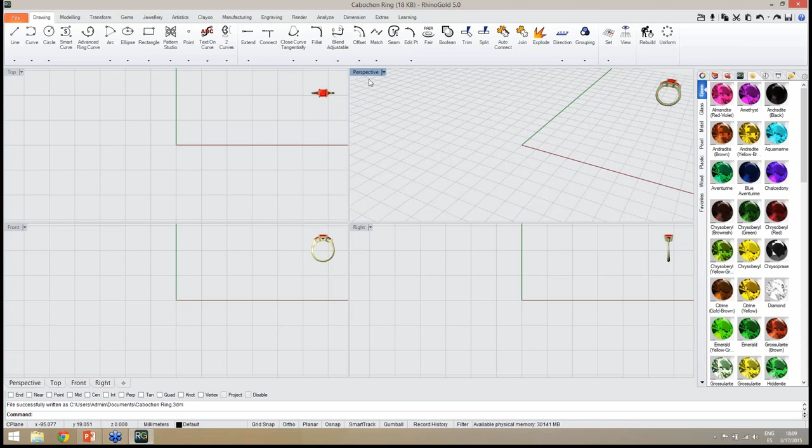Let's start with RhinoGold. Let me open the RhinoGold interface. So let's start making this cabochon ring. And as always, when we start creating a ring, and in this case with a central gem, the first steps I recommend are always the gem, the first gem, and the ring size. So let's create first our cabochon using the Cabochon Studio tool.

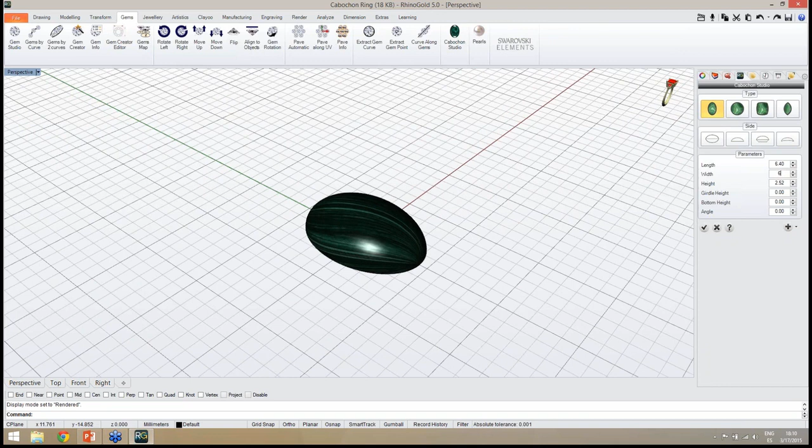As you can see, under the gems tab, we have all the parameters from the Cabochon Studio in this side panel. And now we just need to define the shape. In this case, I'm going to use oval shape, and of course the measures. So in this case, I'm going to use a cabochon with 6 millimeters and 4 millimeters, and then height with 2 millimeters.

Finally, as you can see, it's flat in the bottom. We have several types of cabochon cut. In this case, we are going to use this option, the side height. So this is the idea. First, we create the cabochon, and here we go. So now the idea is to define the ring size.

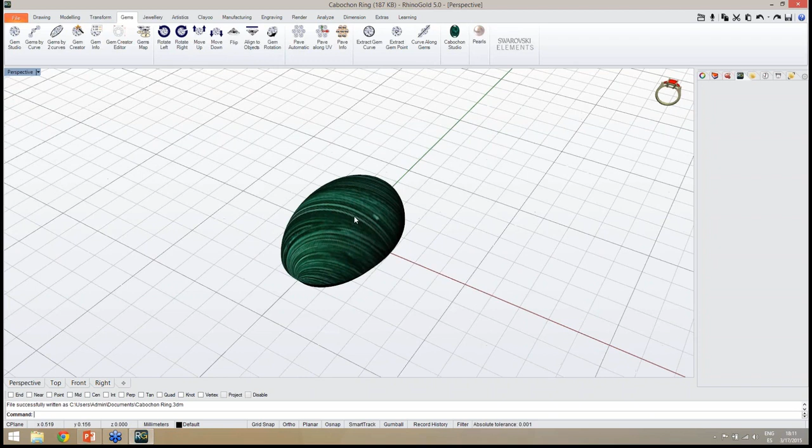Before defining the ring size, I'm going just to move on with the head studio, just to apply a head studio in this cabochon. So I'm going to use, under the jewelry tab, the head studio tool, as you can see. And now the first step is to choose the gem I'm going to use. So I select the gem where I want to apply this head studio, and now we have several parameters in order to define our head.

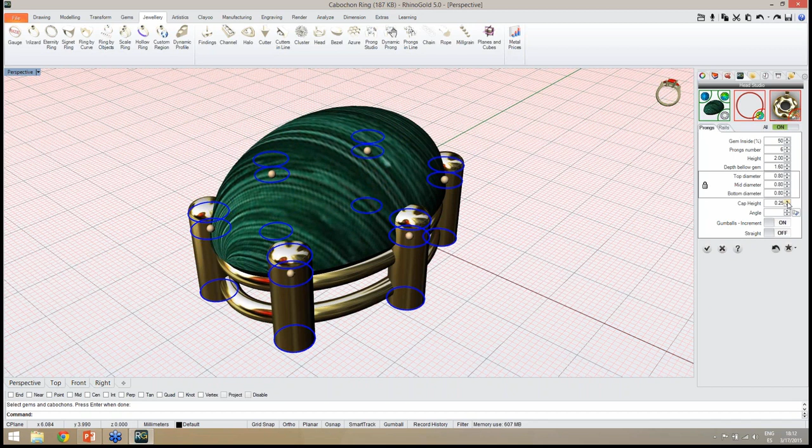So I'm going to start with the number of prongs. I'm going to use in this case 6 prongs. Then I'm going also to define the cap height, in this case 0.25, 0.3, I believe it's more than enough. And of course the percentage from the gem inside. In this case, let's try 25%. Looks good. As you can see, it's a little bit inside the gem.

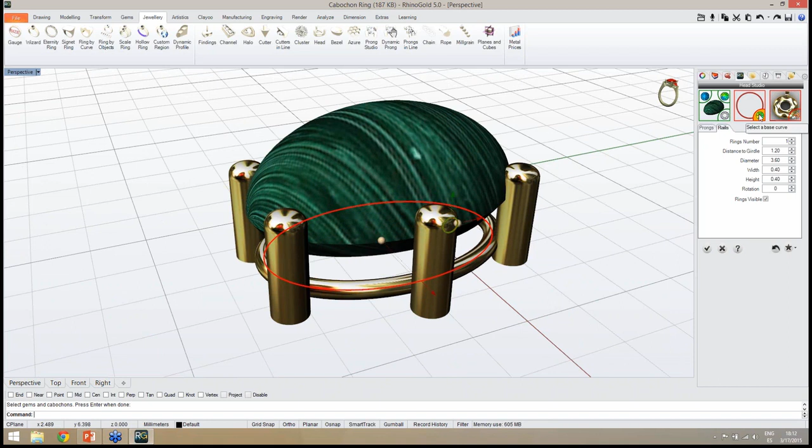And finally, I'm going to the rails tab, and in here I will define the number of rails. First, I want to use just a single rail, and then if I select the rail, you will see that I have more options. I can move down. I can also change my profile. So at this moment it's a round profile. I can change to square, for instance this one. And now I just need to define all the parameters.

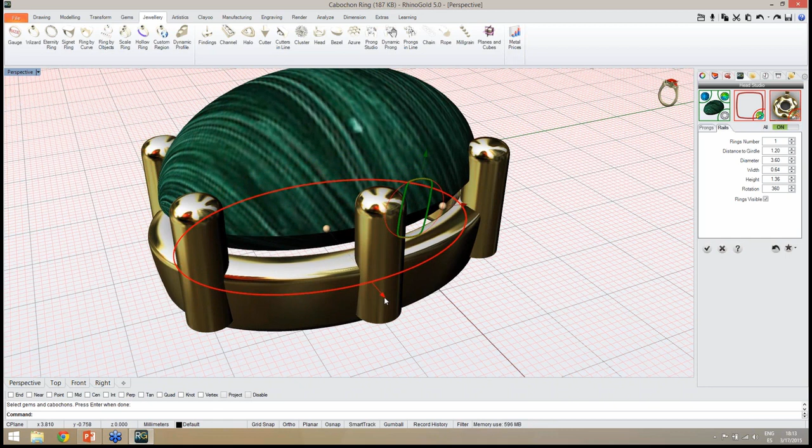So I'm going to adjust my profile, the height thickness. Remember, we can use the side panel parameters to adjust everything as we need. So a little bit more height, and also with this point gumball I can rotate a little bit to adjust the shape exactly as I need, and also with this central point I can adjust the position. Finally, we have this arrow to adjust the size, and I believe everything is perfect as I want this head studio.

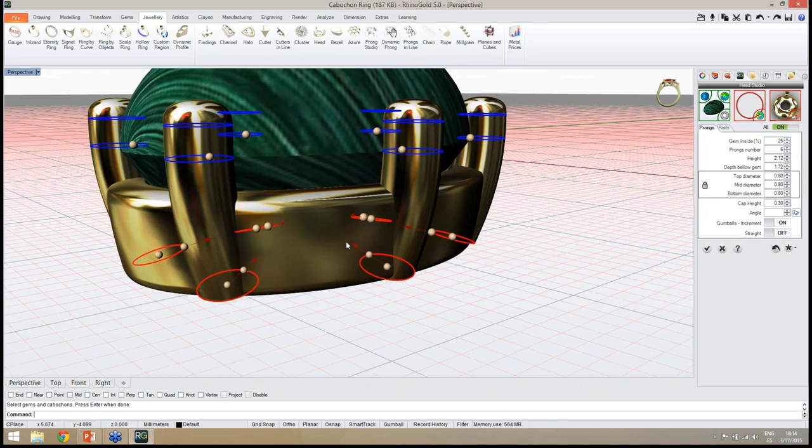And now I'm going back to the prongs tab, and I'm going to select the bottom profile from the prongs and press the Shift key in order to select all the profiles. So after this I can adjust the position just a little bit, as you can see, and all the prongs selected will change as well. So the last step, I can adjust the diameter a little bit less, like this, and move up a little bit. So this is the kind of head I want to use.

Looks good. Now I just need to check in here. So it's invalid geometry, it's trying to make the boolean. We just need to adjust the parameter a little bit in order to make the boolean work. Something like this, I believe, should be enough. As you can see, this is the idea. So now I have my gem, my head studio, and I'm going to define now my ring size.

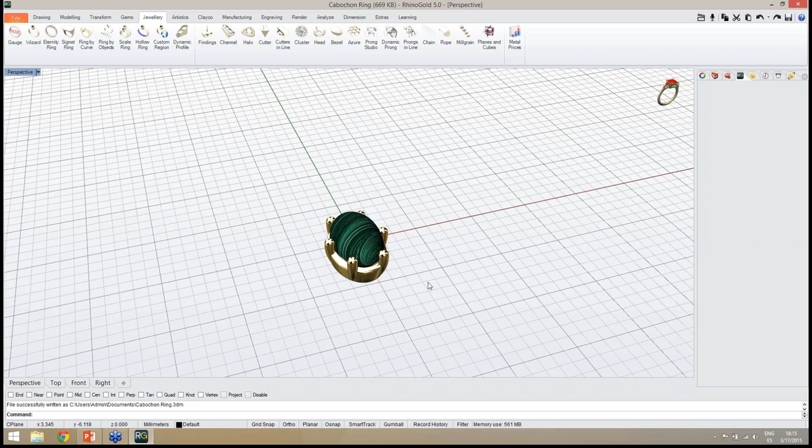So to define the ring size, of course, we could use the gauge tool, or there are several options, but in this case I'm going to the drawing tab, and now I want to use the advanced ring curve tool. So as you can see under the drawing tab, when I select this tool, I also have the possibility to define the ring size. So we have all the ring size charts, and we can define, for instance, number 18 from the European measures.

And now I'm going to move up my cabochon and head studio in the front view to the top of the ring. So I'm going to adjust the positions like this.

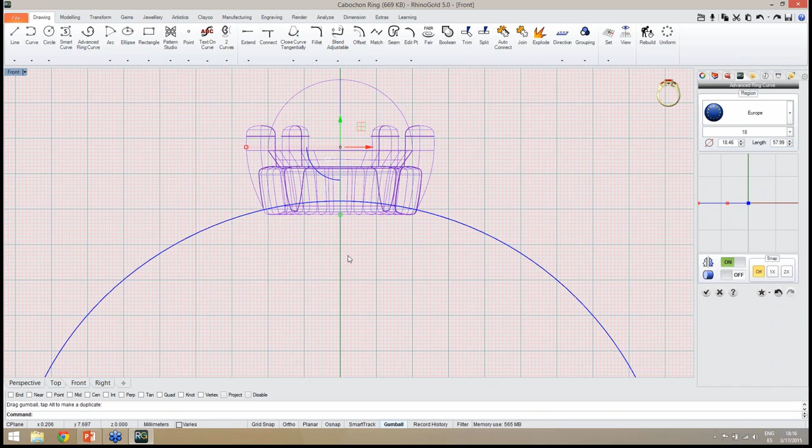As you can see, I leave a little bit inside from the ring size curve in order to cut in the end. So this is the idea. And back to the perspective.

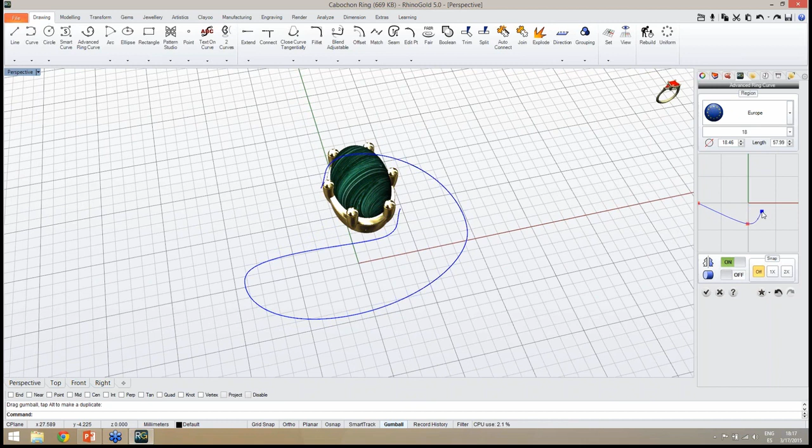Now, using the advanced ring curve tool, I'm going to define the curve that I'm going to use to create the shank of this ring. So as you can see now, I have this curve, and with these points I can define the curve from the ring. So the idea, I want to use the asymmetric curve. So as you can see, the symmetry is activated, and now I can move these points, and as you can see, easily I can define my ring, in this case my ring curve. So I'm going to use this curve to make the model.

Probably in the top view will be easier to define what we need, and the idea is to define with these points, dragging the points to define the curve exactly as we need. Also remember, we can double click on the curve to add another point if needed. In this case, I believe it's easier with another point, so I just drag my points to define the curve exactly as I need. In this case, something like this, I believe it's enough, so just need to adjust the curve a little bit more.

If needed, then we can edit this curve, so there isn't any problem if it's not exactly as we need. From the top view it seems good, but if needed I will edit. So for now I will keep it exactly like this. Okay, remember also you can activate the grid snap. I didn't use it in this example, but remember you can use it for other models. And now I just check in here to add the curve to the document.

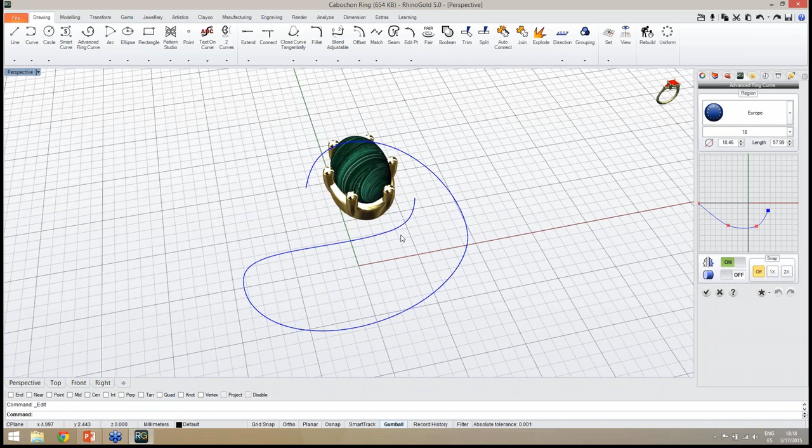So now, as you can see, I have my ring curve, and I have my cabochon and the head studio. I just want to make another thing. As you can see, I select the curve, and with middle mouse button I have the option to edit the curve. And what I want to do in this case is just to add this cylinder. As you can see, it's exactly the same diameter as the ring size I want to use, and the idea of this cylinder is to orient my surface, the surface I will create to define the ring shank.

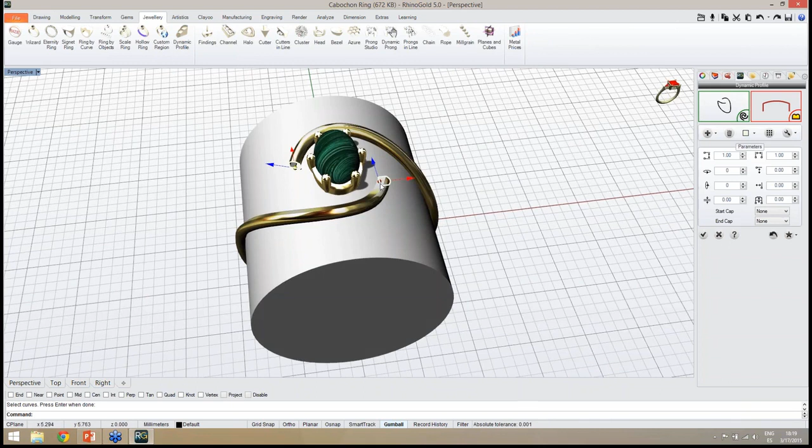So now the next step will be to use the dynamic profile tool. Under the Jewellery tab, we can find the dynamic profile icon. And when we use this tool, the first step, we need to select the curve where we want to apply the profile. So I will select this curve, press enter, and automatically, as you can see, I have my dynamic profile. One profile in the start of the curve and the other in the end.

So the way I want to do this profile, I will need more than two profiles. So I could add one by one in here, or in this submenu I have the option to add directly the number of profiles I want to use. So I will use 5 profiles. So I just need to say OK, and as you can see, all the profiles were added to the curve, but as you can see, the orientation is not exactly as I want.

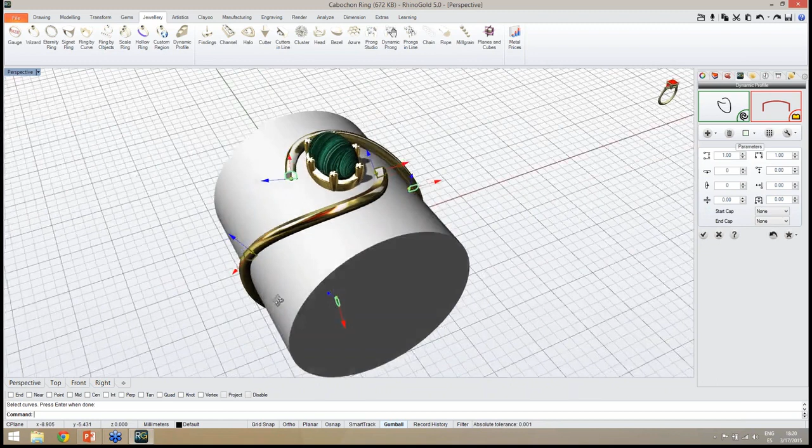So what I need to do is, with all these profiles selected, I just need to define in this parameter the orientation by surface. So when I choose this option, I just need to define, as you can see in the command line, an object to use as reference. So the surface I want to use is the surface from the cylinder, and automatically, as you can see now, all the profiles are exactly oriented on the surface I defined. Okay, so as you can see, this is really easy.

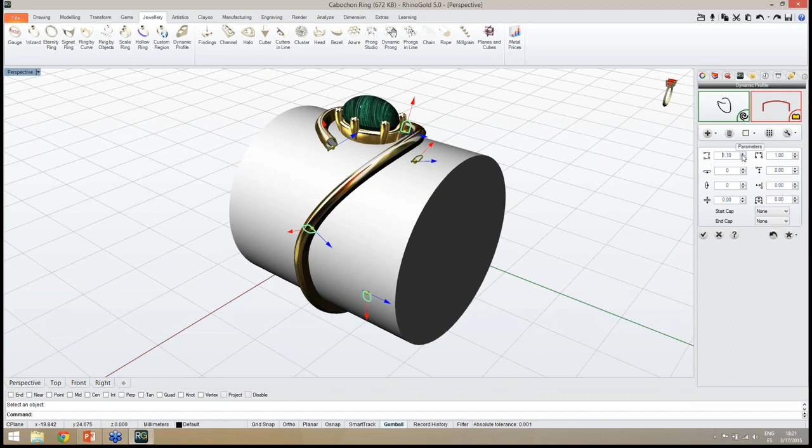The next step, I just need to define the measures I want to use on this profile. So I'm going to define height. I'm going to use 1.5, and width I'm going to use in the bottom, I believe 2.5. It's enough, and then I will change in the others. So the idea is just to adjust in the bottom maybe 2.5 millimeters, as you can see. And now in the others, one final detail before I move on to the other profiles.

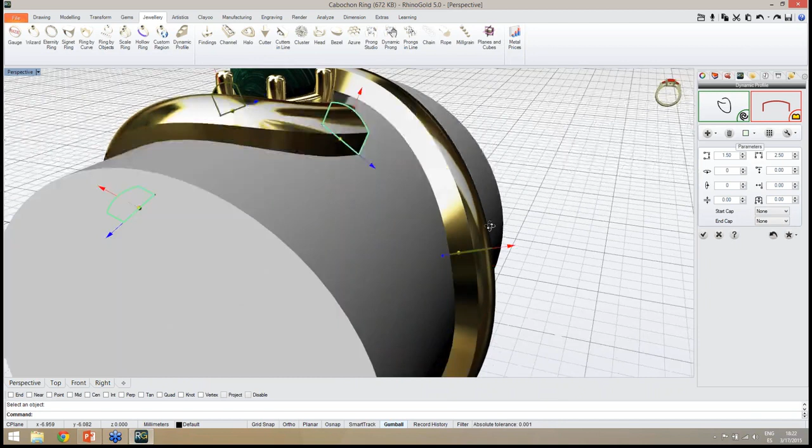This, I believe, is an important parameter. As you can see, the profiles are flat in the bottom. And also we have a cylinder in here. So in some cases there will be some parts of the model where, for instance, in here we can see, even if it's oriented on the cylinder surface, with a flat profile and a round surface, there are some points where we have the profile a little bit inside and a little bit outside.

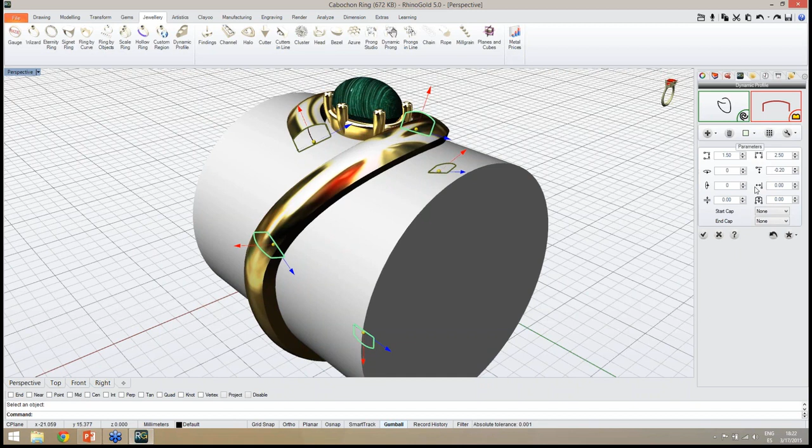So a good way to avoid this is to define in here the position. We can define a little bit inside of the cylinder. As you can see, with all the profiles selected, I will define 0.2 millimeters inside the cylinder. Let's take a look in the front view. The profile is a little bit inside.

So the idea is exactly like the head studio. I leave a little bit inside, and then I will cut to respect the ring size. So I will use 0.2 millimeters inside, and then I can adjust the overall, in this case, the height I want to use. I can define the 0.2, or I will keep 1.5, looks enough. And now I deselect this profile. So remember, to deselect, you just click on the profile and it's deselected.

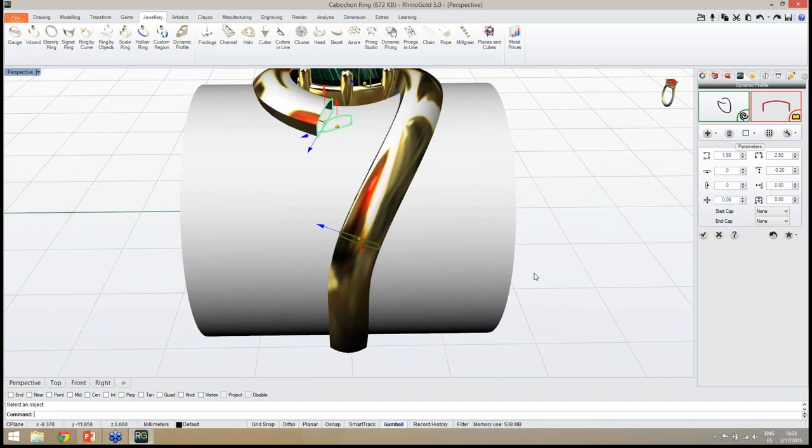And now I will adjust the others. These ones I will keep exactly in this position, and then if needed I will adjust. So I deselect this one, and I deselect also this one. Okay, so now I just need to adjust these 2 profiles. Remember, it's important, I want the profile to touch in the head in order to make the Boolean operation. So I will define in here a little bit more, as you can see.

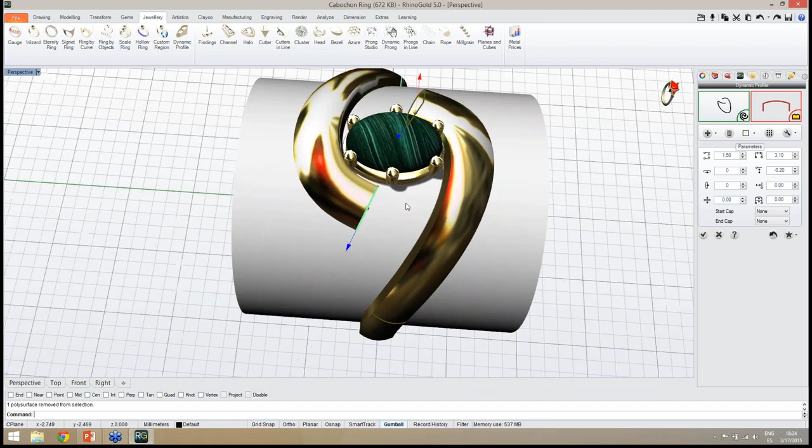So remember, it's important the profile touching in the head studio, so metal will be touching with the other metal part in order to be able to make the Boolean operation. So I believe exactly like this is good. Remember, at this point, if I needed to edit the curve, I could just check in here, edit the curve, and then the dynamic profile would also be updated. Of course, we can also edit the dynamic profile.

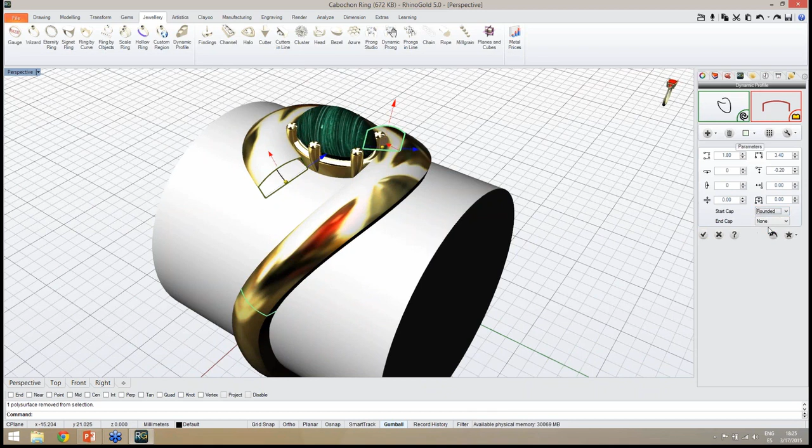One other thing in here, I will use a little bit more than 1.5. Let me adjust to 1.8, looks good. And finally, the caps, by default, it's none, so it's an open polysurface, but I can define a flat cap or rounded cap. In this case, I will define rounded cap in the start and in the end. And of course, I need to define the cap height. So the idea is to define the height we want to use. As you can see, in this case, let me adjust a little bit more than 0.5. Let's try 1 millimeter. Looks good.

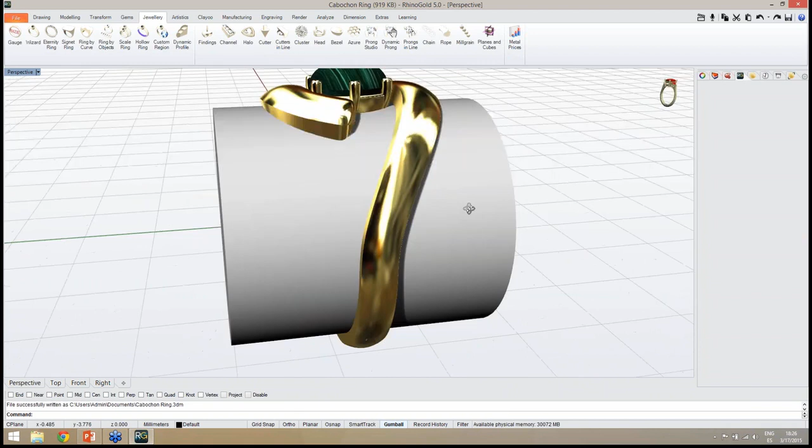And after this, the shank is what I'm looking for. I just need to check in here in order to add this dynamic profile to the document. So now we want to add a few gems in the shank, and to add the gems I will first create a recessed area to define the gems position.

So to do it, I'm going to the modeling tab. I need first to create the curves where I want to create this recessed area. And a good way to define the curves, we have this tool, which is, in this case, under the offset submenu, the tool offset curve on surface. So I select this tool, and as you can see in the command line, I need to select a curve on surface. So in this case, I'm going to start with this one.

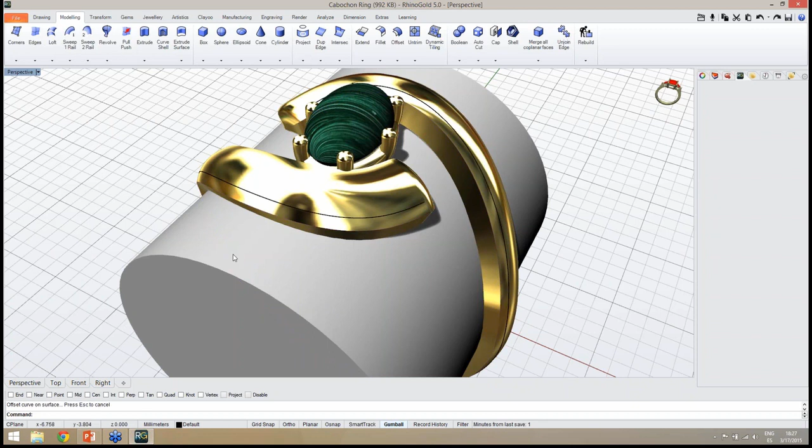So I select the curve, and as you can see, I have the selection menu because in here I have two edge curves, from the side surface and from the top surface. I'm going to use, as you can see by the arrows, the top surface. So I select the edge curve, and in the command line, I just need to define the offset distance. So in this case, I'm going to use 0.6 millimeters and press enter. As you can see, automatically I have the curve on the surface, with the distance of 0.6.

This is the idea. And now let's move on to the next step, which will be exactly the same. Once again, offset curve on surface tool. I select the curve on surface, in this case this one, and then I just need to define once again the top surface edge. So this is the one, and you can see the direction from the arrows. And once again, I will use 0.6 millimeters. So I just press enter, and once again I have my curve on the surface. So next step, I'm going to define the curves in the other direction. I believe it's easier to use the tool extract isocurves.

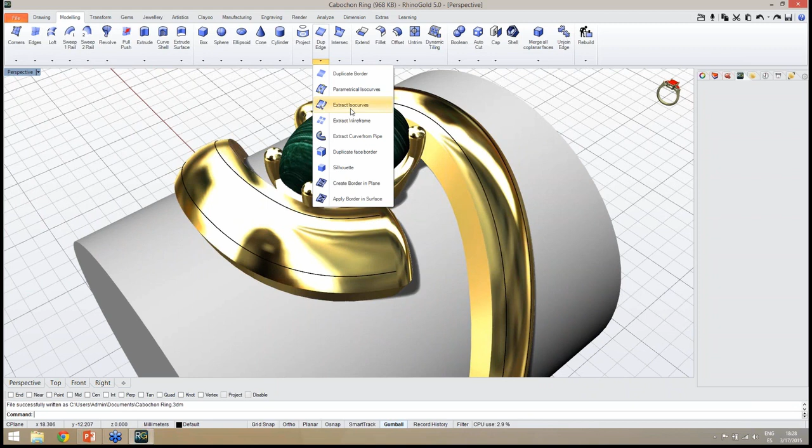So when I select this tool in the modeling tab, duplicate edge submenu, extract isocurves, I just need, as you can see in the command line, to select the surface I want to extract the isocurve. So I select this top surface, and as you can see, I have one curve, but this is not the direction I want. So in the command line, I just choose the option toggle, and as you can see now, I have the direction I want to use.

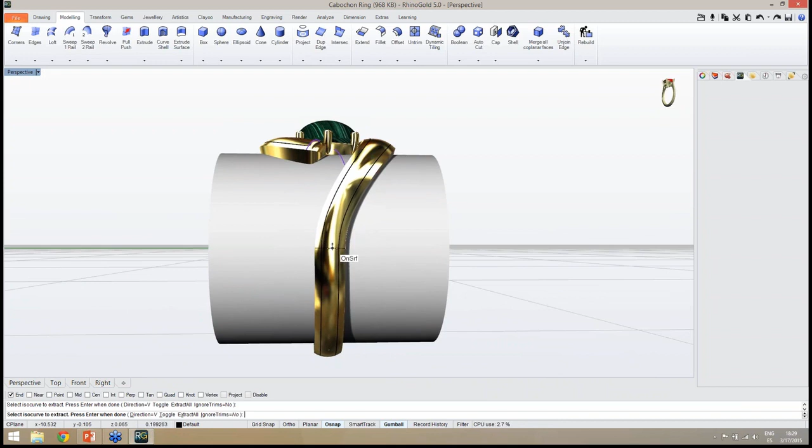So the idea in this case, I'm going to enable the endpoint, exactly the endpoint, and as you can see now, I can define. I just click in here, and I have one curve in here, and in the other side, I will do exactly the same with the endpoint. I create the other curve. Finally, then I need to define the end of this area. I will apply the recessed area for the gems in the middle of the shank.

So the idea will be, we can use, of course, the right viewport. I will do it in the perspective like this. I believe it's more than enough. So I just click where I want to define from one side and exactly the same from the other. I just define in the middle of the shank and I click, in this case I remove the endpoint, and I click to add the curve. In the end, press enter, and as you can see, let me select all the curves except this one. So as you can see, we have all the curves.

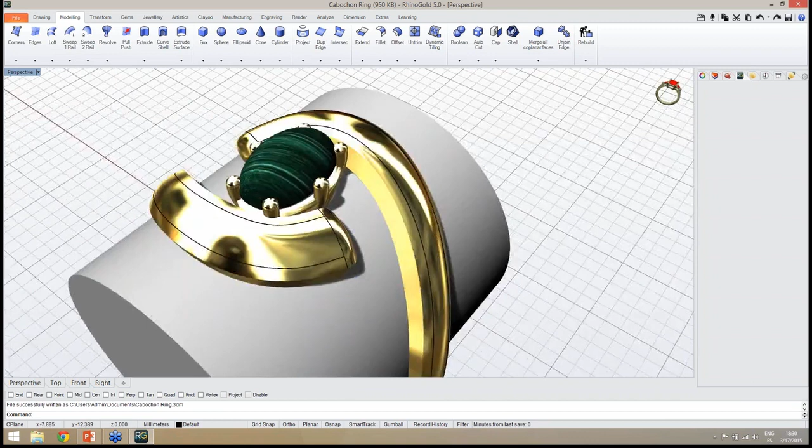We just need to trim these curves in order to get the closed curves we want to use to create the recessed area. So let's go to the drawing tab, and now I'm going to use the trim tool. As you can see, trim tool, and now I need to select the cutting object. So the cutting objects will be, in this case, all the curves. So I select this one, this one, this one, and also these two. Okay, as you can see, after selecting all the curves, you just need to follow the steps in the command line. I just need to press enter, and now I need to select the objects to trim.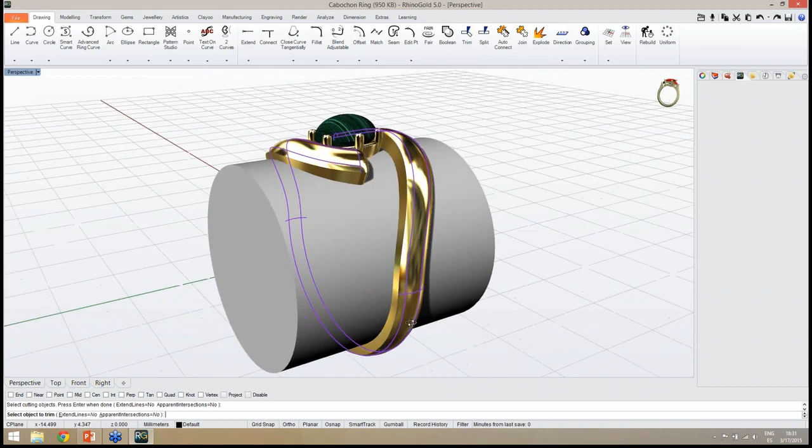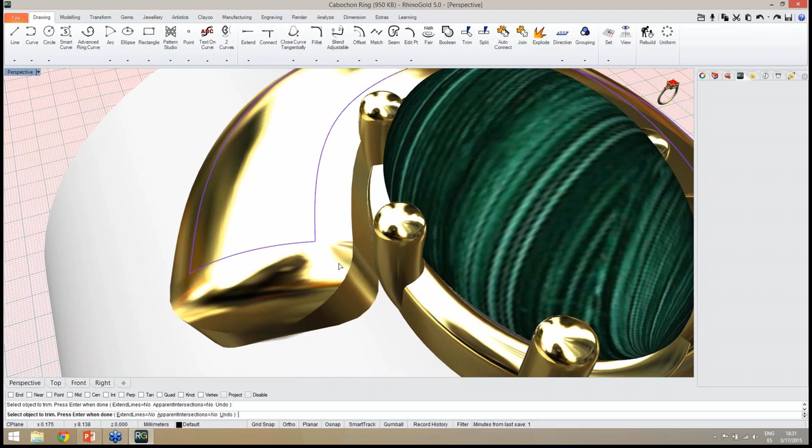So now I just click on the part of the curve I don't want, like this, I define the curve, and also in here, this part of the curve, this part of the curve. The same in here, I define this curve, and in the other side exactly the same. This curve, and as you can see, I have one side ready and exactly the same to the other. This part of the curve I want to cut, also this part, and also this part, and finally the last one, this part. Okay, as you can see, now I have the curves ready.

I just press enter, and now as you can see, we have one curve in here, other in here, other in here. We just need to join all these curves in a single closed curve. To do it, I could use the join tool. I select all the curves and use the join tool, but to do it automatically, we have the auto connect tool. So when I click on auto connect, automatically it will connect all the curves in a closed curve, so I don't need to select them.

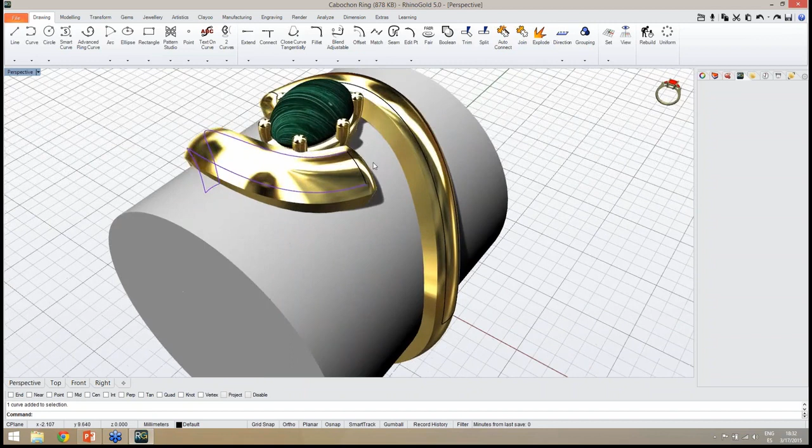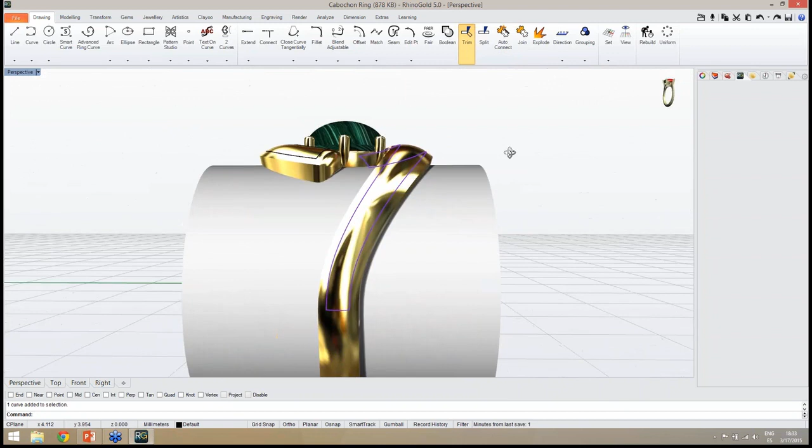As you can see now, I have this one, and in here for some reason it's not touching. So let's take a look to see what happened. If I select this one and the other one, we will see, if we zoom in, that this is the problem. That's why it can't join. So we just need to trim again the other part. So it's very easy. Once again, with the trim tool, I want to cut this part of the curve, and the same to the other side, this part. Enter, and now if I use the auto connect tool, let's see the results. As you can see, now I have the curve exactly as I want.

As you can see also in the side panel, we have the properties panel, and when we select the curve, it will say the object type is a closed curve. The same to the other side. I can select the curve and we can check it's a closed curve. So this is the idea. Now I have the area I want to use to create the recessed area. Now I will just define the recessed area. So let's go to the modeling tab, and in here we have the pull push tool.

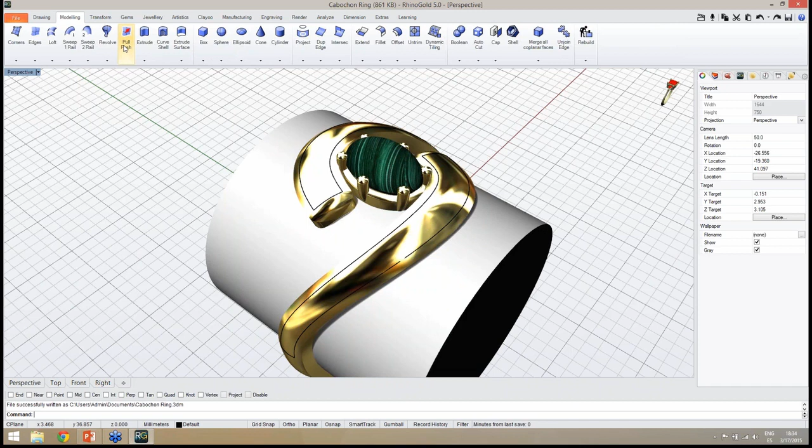So with the pull push tool, we need first to select the surface or the object we want to use, in this case this one, and the curve to cut, this part, and as you can see, automatically it will create the recessed area. Of course, I just need to define the distance I want to use.

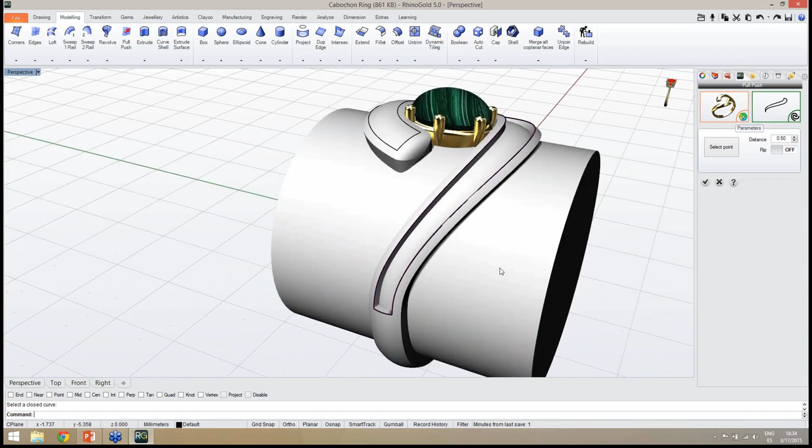In this case, I believe 0.5 millimeters is more than enough. As you can see, we can also check in the front view if everything is exactly as we want. And with 0.5 millimeters, I believe it's more than enough, so I just need to check in here to apply the changes. And also the same step, exactly the same parameters to the other side.

So I just select the pull push tool, I select the surface, the object I want to use, and then the curve to create the recessed area. So once again, I define the curve, the distance, and 0.5 millimeters. Looks very good. And check in here to add the changes. So this is the idea.

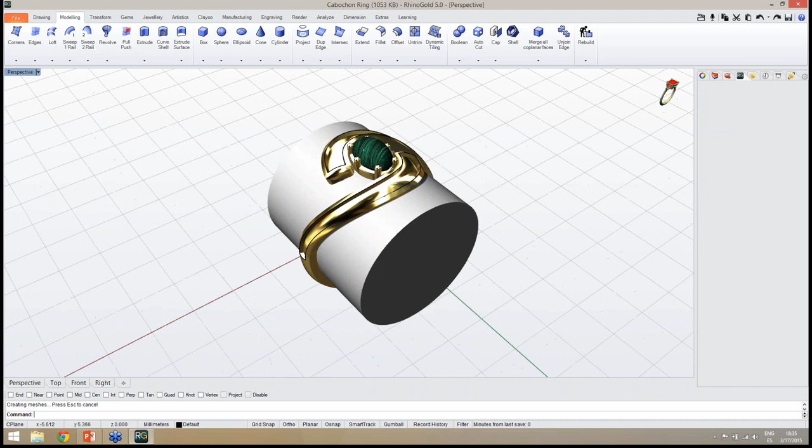Now I can, for instance, select these curves. Remember, Shift for multiple selection, and I can go to the layers, create a new layer, and type curves. And in this new layer, I just need to change object layer, and from here I can hide this layer.

So now I'm going to apply some gems on this shank. The idea will be to apply the gems along this surface, and to do it easily, I'm going to extract this surface in order to orient the gem.

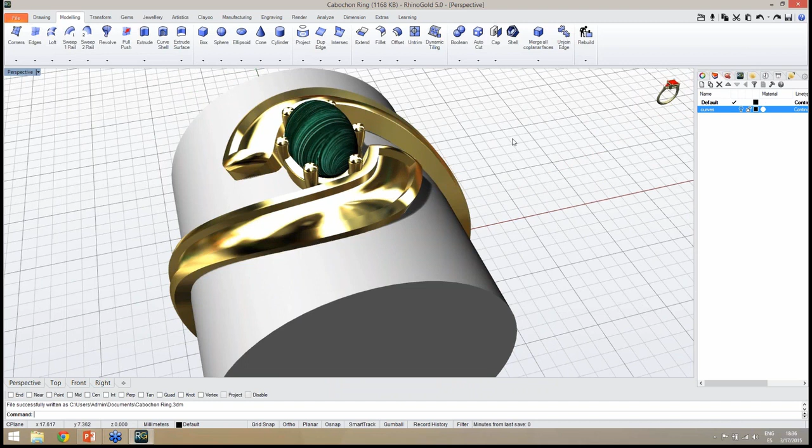So to do it, it's very easy. Under the Modeling tab in the Cap submenu, we have the Extract Surface tool. The idea is to select the surfaces to extract. One option we have in the command line is if we want to copy. By default, it's no, but I will say copy yes, because I want to keep my closed solid, but I want to duplicate the surface.

Now I just need to select the surface I want to extract, this one and also this one, press enter, and now we have the two surfaces we want to use to apply the gems.

One other thing I'm going to do is to create a line in the middle of the surface to apply the gems along this curve. So let's go to, once again, under the Duplicate Edge submenu, we have the Extract Isocurve tool.

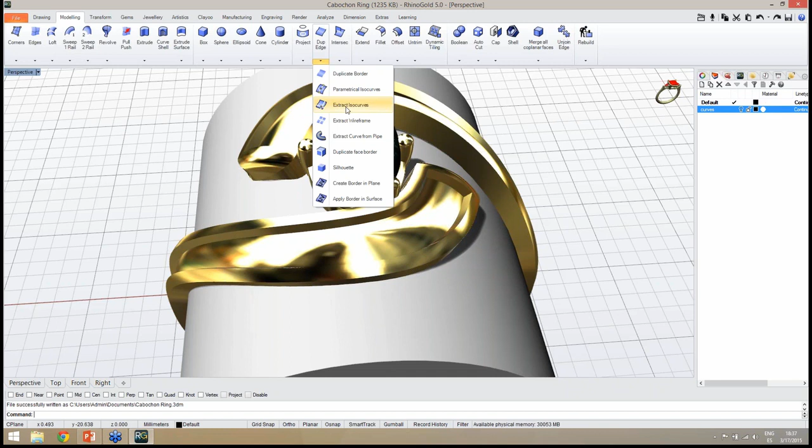So I select this tool, and I need to select the surface for isocurve extraction. I select the surface, and I need just to toggle the direction, and now I want the midpoint. So I just need to enable it in the OSNAP, the midpoint option, and as you can see in here, I will have exactly the midpoint from this surface.

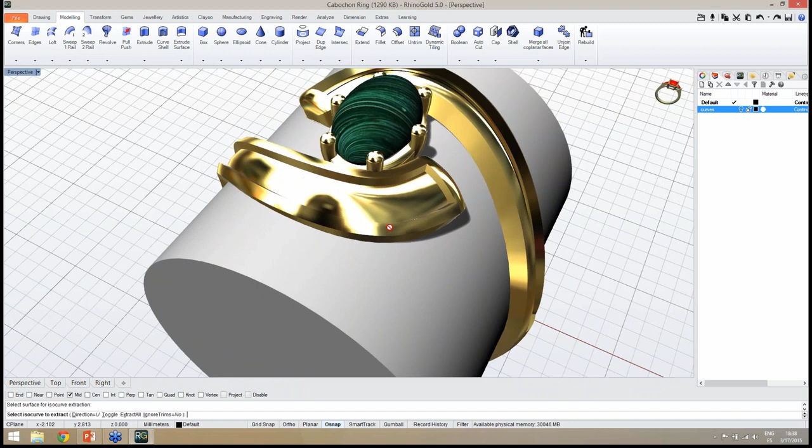So I have the curve in the middle of the surface, press enter in the end, and exactly the same to the other side of the ring. Once again, Extract Isocurves tool, I select the surface, and then I just define the midpoint. Press enter in the end, and we have the two curves ready to apply the gems.

So this is the idea.

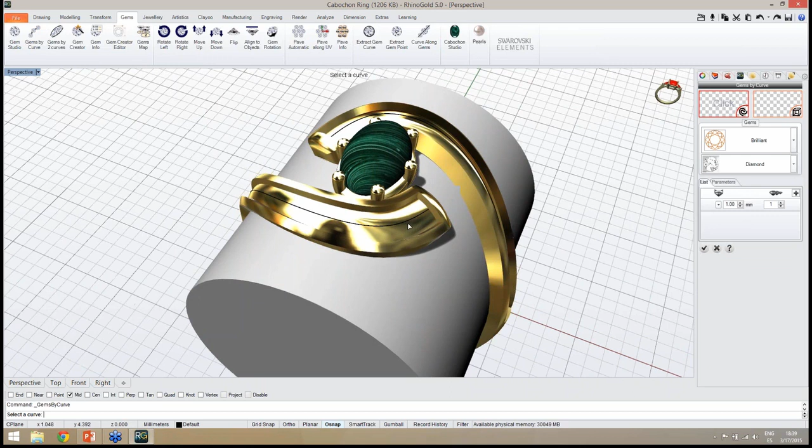Now the next step, I'm going to the Gems tab, and I'm going to use the Gems by Curve tool. So Gems by Curve tool, I just need to define the curve I want to apply the gems. So I will select this curve, and as you can see now I have the gem in here.

Of course, I have several parameters to adjust, but now instead of using the gumball to orient and define the gem's position, I will use the option to orient on object. So I select this option and I will use the surface we defined before. As you can see, automatically the gem will adjust to the surface.

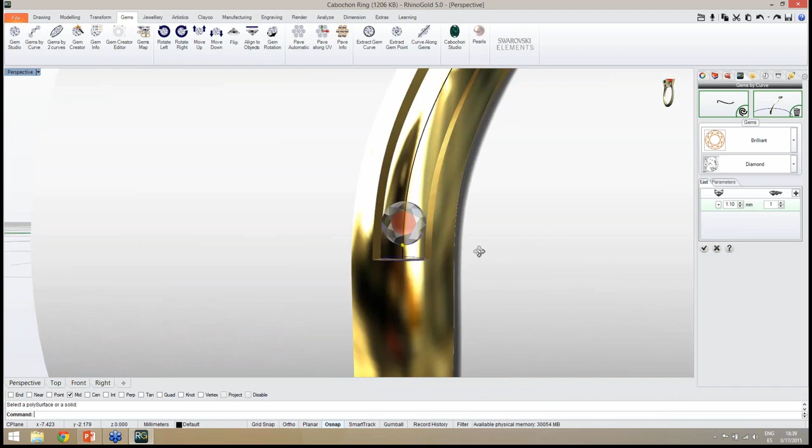So I'm going to define the start point a little bit more inside in order to have some space to then apply the prongs in here. And now I just need to define the gem size. In this case, I'm going to start with gems with 1.1, and I'm going to add a few more, as you can see.

A little bit more, and from here I'm going to start adding different gem sizes. So now I'm going to the add option, and here I can define another gem size. In this case I will use 1.3, and then once again I can add more gem sizes, same workflow, I define one other gem size.

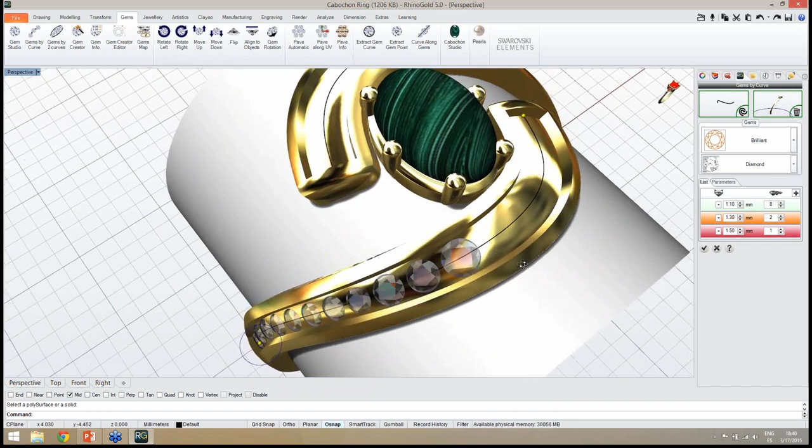In this case 1.5 looks good, and the number of gems I will add just 1. So another gem size, let's try 1.6, and the number of gems just 1. Let's move on exactly the same, now 1.7 millimeter gem and 1 gem.

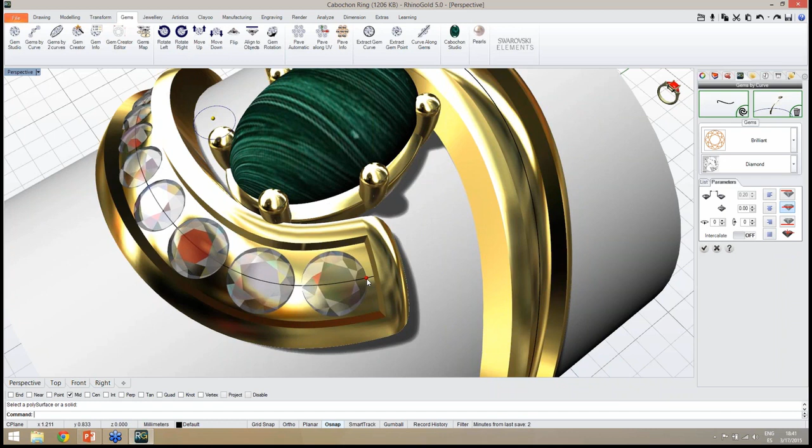So once again, now another gem size 1.8 millimeters and the number of gems, and finally let's use another 1.8. Remember to leave some space for the prongs. We also have the possibility to divide the number of gems along the curve, so I just need to define the justify, and here I can adjust.

So I will leave some space for the prongs in the corner, and all the rest looks good. From one side I have the gems exactly as I want, so just checking here to add the gems to the document. Now I will repeat this step with exactly the same workflow, using the gems by curve tool. I select the curve I want to apply the gems, this one, and then we define the surface to orient the gems, in this case this one.

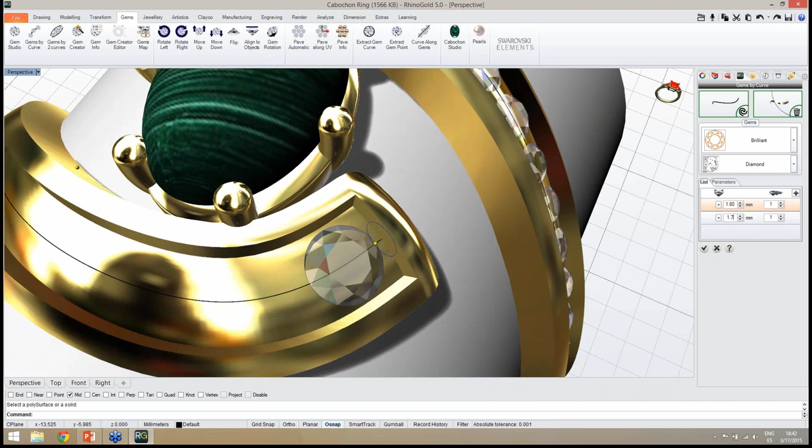So easily I can define the first gem with 1.8 millimeters, and let me adjust something like this, looks good. Now another gem size, let's define 1.7 and 1 gem. Maybe let me use 2 gems with 1.8 millimeters, and 1.7 will be the third.

Then another gem size, and I will define 1.6 millimeters and 1 gem with 1.6 millimeters. Then another one, with 1.5 millimeters. Let's move on, another gem size with 1.4 millimeters.

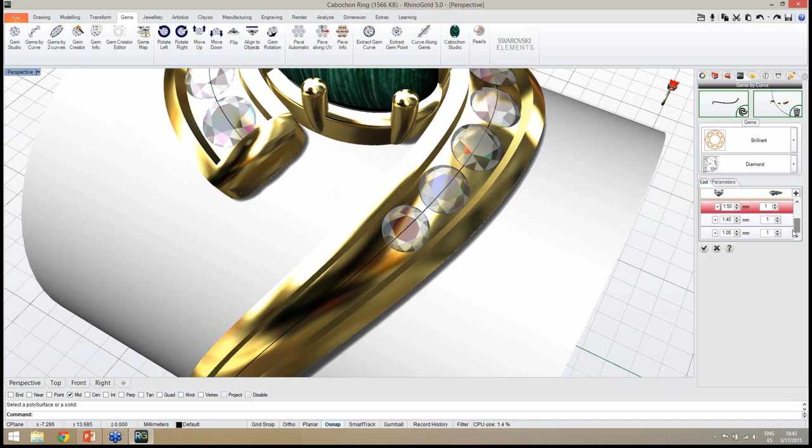And now repeat once again, 1.3 millimeter gem, number of gems 1, and another one with 1.2. Finally, 1.1 millimeter gems, and the number of gems I'm going to add a few more. So let's add another one, and once again I'm going to justify to divide the number of gems along the curve.

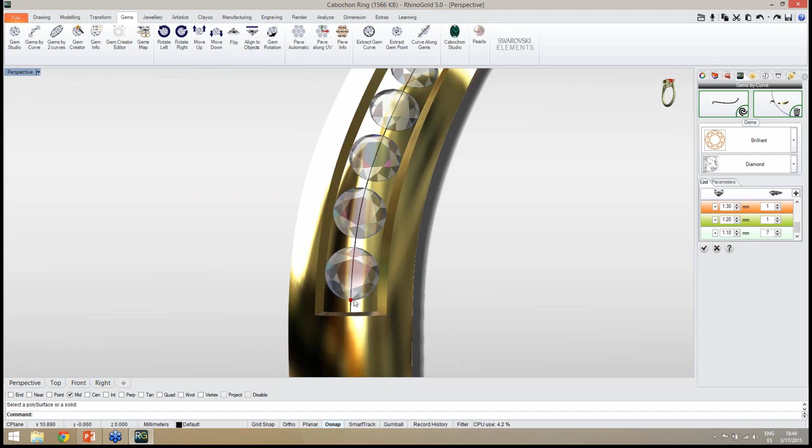So now I can easily adjust the space I want to leave for the prong. A little bit here, I believe it's perfect. The space we will need for the prongs looks good, and on the other side I believe it's also exactly as we need. I just check here to add the gems to the document.

So as you can see, this is the idea. Easily I define the gems along this curve, so I can select this curve, change the layer, okay, and now I'm going to define the prongs.

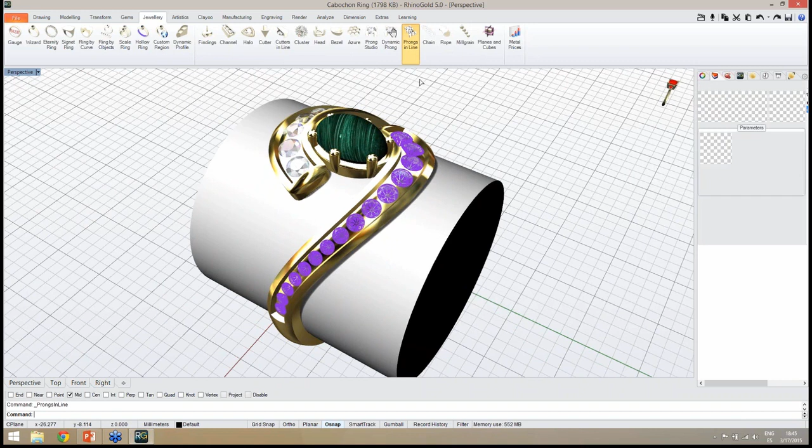So I select the gems, in this case the gems, so it will be this group, and I will apply some prongs for this gem. In this case I believe the best option would be the prongs inline tool, under the jewelry tab. As you can see, automatically I have the prongs between gems.

I just need to define the parameters: the diameter, the cap, in this case I'm going to use round cap, 0.10, 0.15, I believe it's more than enough. Now I just need to drag this to define the prong position. As you can see, easily I drag the prong to one side, and then I have the symmetry. Remember, if I press shift, it will apply to all, and I only need to define the end prong.

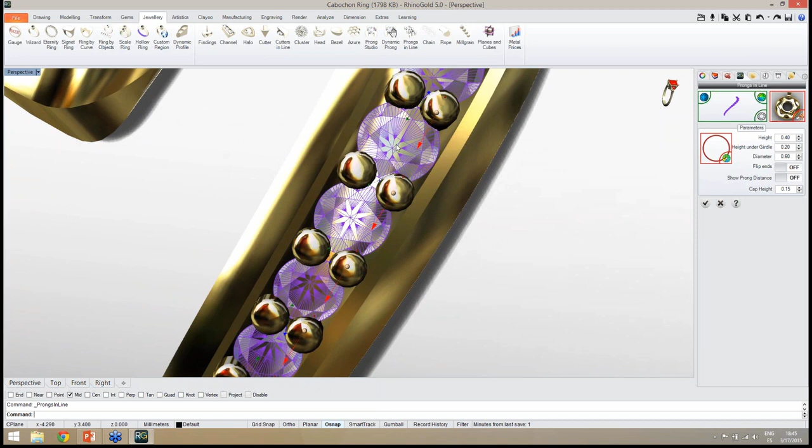I believe here it's good. Of course, here probably we need to adjust manually if we need more space. Remember, if you don't press shift, you can edit all exactly as needed. In this case we can adjust the space between prongs a little bit more. So easily I can adjust the prongs like this, the same here.

And remember, in the end it's also possible to edit the prongs. We will see, probably we will need this in this case, so it's easier in the end to edit the prongs. So here I leave it exactly like this, the same here, and then I can edit the prongs. So I apply the prongs, checking here to add the prongs to the document, and I will repeat this step to the other side.

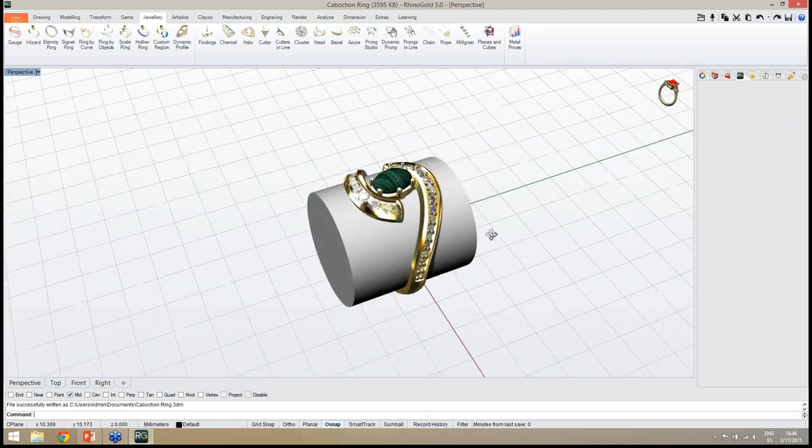So I select the gems, and then once again with the prongs inline tool, I just define diameter, cap, and finally I can drag the prong. In this case I will press shift to apply the changes to all, and then I just need to adjust the end prongs, and of course the other gem sizes I will adjust as well. So here looks good.

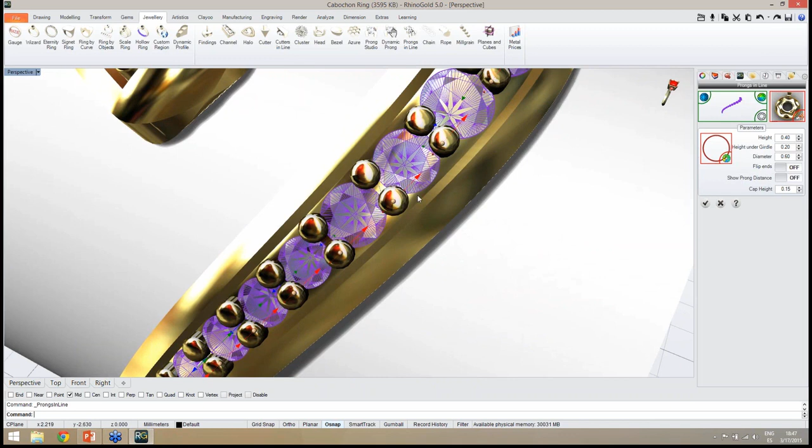And here I will start adjusting a little bit more the distance between prongs, something like this. So easily I just need to drag this point gumball from one side, and the other will follow exactly the same orientation. So easily I can adjust the prongs position, and the same here.

So once again, in the end I will adjust something like this, and check in here to add the prongs to the document. As you can see, easily we can apply the prongs for these gems.

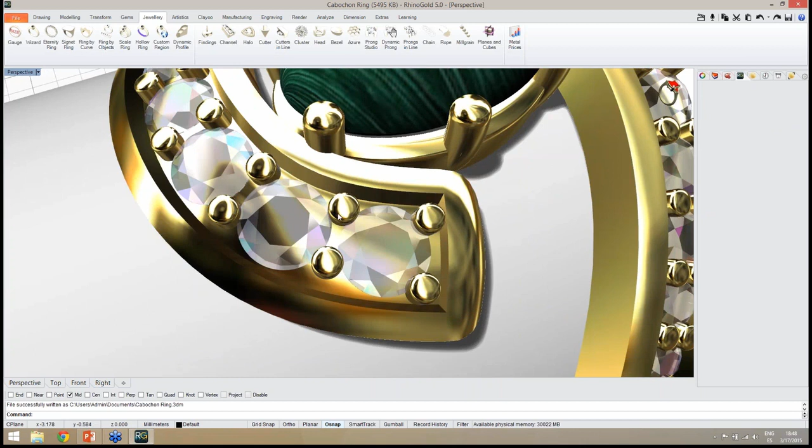Now if I want to adjust, for instance, the prong from this side a little bit more outside, and I don't want to touch this one, the best option we have is to edit the prong. So easily I select the prongs, I press middle mouse button, and I choose edit.

Now I can edit the prongs easily. We have all the parameters for the measures, and of course I can move the prongs position. As you can see, when they are blue they are selected, but if I want to drag it in order to change the position, I can't do it. Why? Because I need to select object as reference.

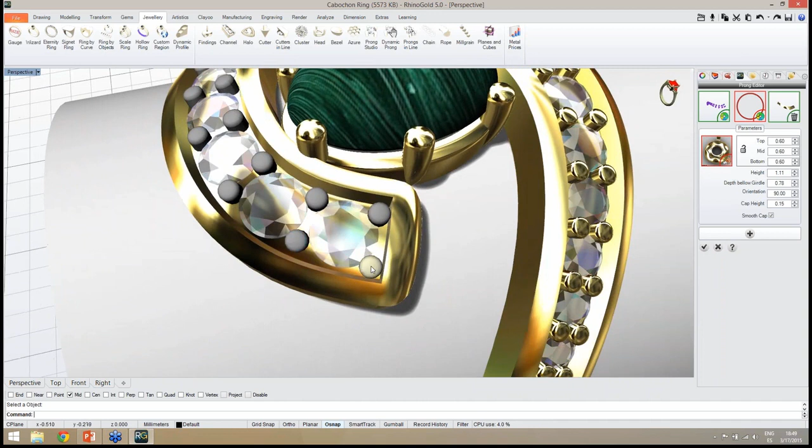So in here I just need to click in here and define, okay, I will use this surface as reference to orient the prong. So easily then I can adjust the prong's position. Just drag the prong, define exactly the position to be used, and we can adjust the prong exactly as needed.

So this is the idea. Really easy. In the end, checking here to add the changes to the document, and I will adjust as well the other side. Once again, select the prongs, edit, and with prong editor we just need to select the surface, and easily I can adjust the prongs position.

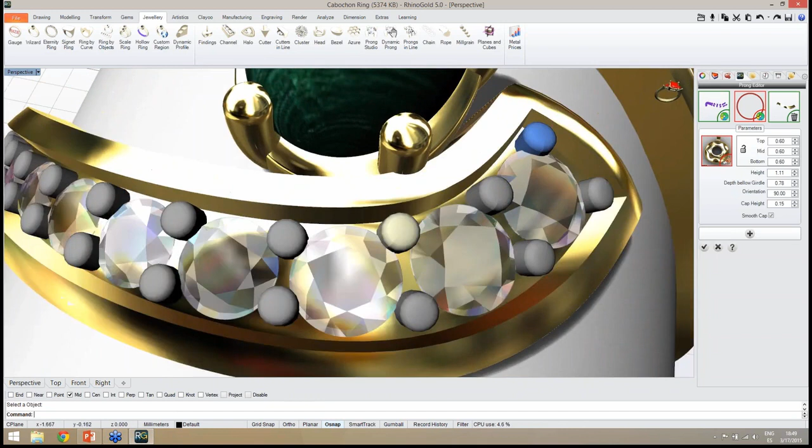Here, here, here, and as you can see, easily we define the prongs exactly as we need.

Once again, checking here to add the prongs to the document, and now we have the hard part of this model done. Of course, we need a few more details.

Now we have the shank as one part, and we have the head as other part. So I will make all of them as a single object. So I need to make the Boolean union.

First, I will just select the surfaces I've used to orient the gems and the prongs. I will select these surfaces, and once again I'm going to create a new layer, and I will call it surfaces, and I will right click, change object layer. So easily I can hide the surfaces in this layer.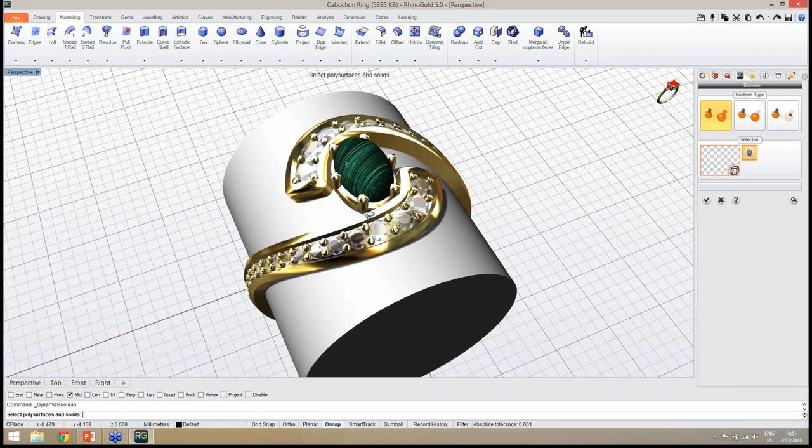So the next step will be the Boolean operation. Modeling tab, Boolean tool, and now the first option is Boolean union. I just need to select the objects I want to make the Boolean operation, so the shank and the head.

Press enter, and we need to click on preview to preview the changes. As you can see, easily we make the Boolean operation between the shank and the head. Now let me hide the circle. We leave a little bit inside.

Now I can easily cut my shank in order to respect the ring size. So to do it, I just need to use this cylinder. This cylinder, I'm sure it's exactly the ring size I want to use.

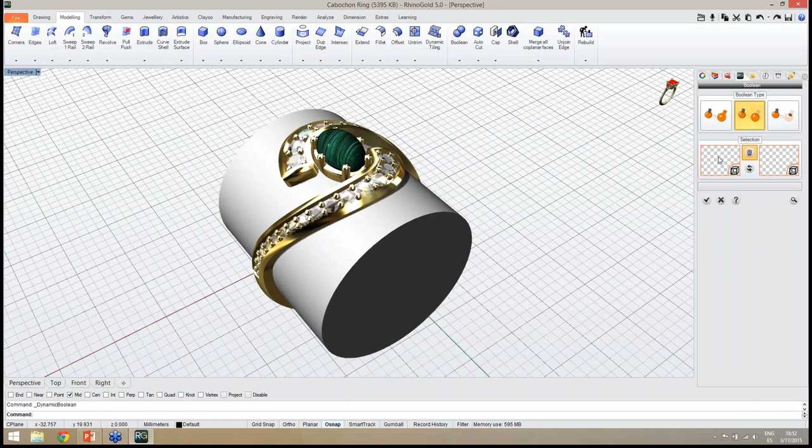So now, once again, Boolean operation, but now I will use the option Boolean difference. So first, objects to keep, and then objects to remove. I will select the cylinder, enter, and let's preview the result.

As you can see, now I just check in here, the Boolean operation was successful, created, and in the front view, as you can see, now I have the perfect circle, exactly the ring size I want to use. So this is the idea.

Really easy to define the model exactly as we need. And the next step, I need to create the stone seat. So as you know, we have this solid shank.

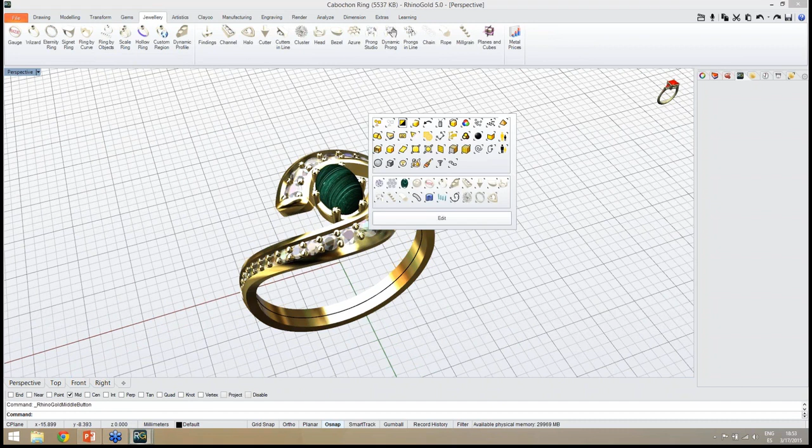I just need to make the Boolean operation, first create the cutters, and then with the Boolean operation to remove the cutters from the shank. So middle mouse button, and I select all the gems in the document, and then with the cutters tool in the jewelry tab, automatically I will generate the cutters for all these gems.

So I just will use the default parameters. I won't adjust anything. Checking here to add the cutters to the document, and finally under the modeling tab, dynamic Boolean tool, and once again let's choose the option Boolean difference.

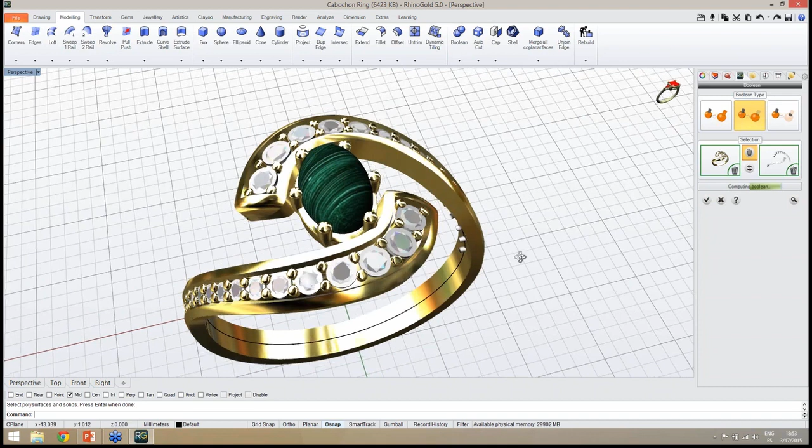First the object to keep, the shank, and then the objects to remove, in this case the cutters. Let's click on preview to calculate the Boolean operation, and as you can see, easily we create the Boolean. So easily I remove the cutters, and let's hide the gems.

So middle mouse button, and I select all the gems, and in here I can hide the gems to see the results. As you can see, easily we create all the stone seats, and this is the idea. So let's show again the gems.

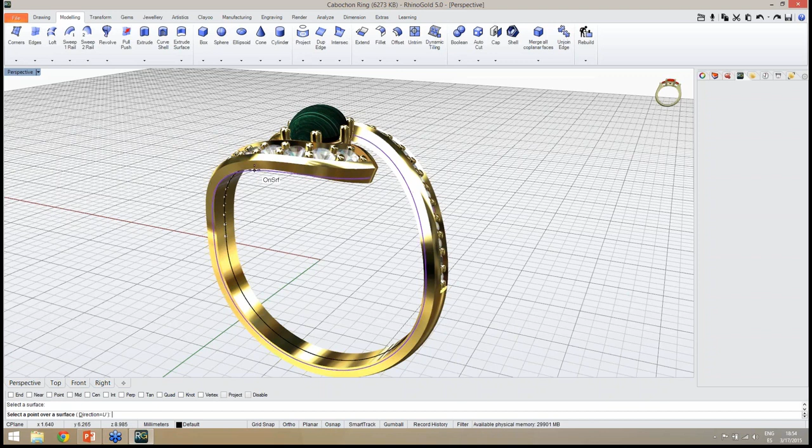So the last step, I will apply a mill grain on this side. So I just need to define the curve I want to apply the mill grain. So let's go to the duplicate edge submenu, and now I'm going to use the parametrical isocurve tool. So in here, once again, I need to select the surface I want to extract the curve. Let me remove the midpoint option, and now I just define where I want to apply my curve.

So I will select here, and one option we have with this parametrical isocurve, we can define with these point gumballs where we want to start and where we want to end the curve. So I want to start in there, but I want to end more or less where the gem is. So in here, and I press enter, and as you can see, I have the curve exactly where I want.

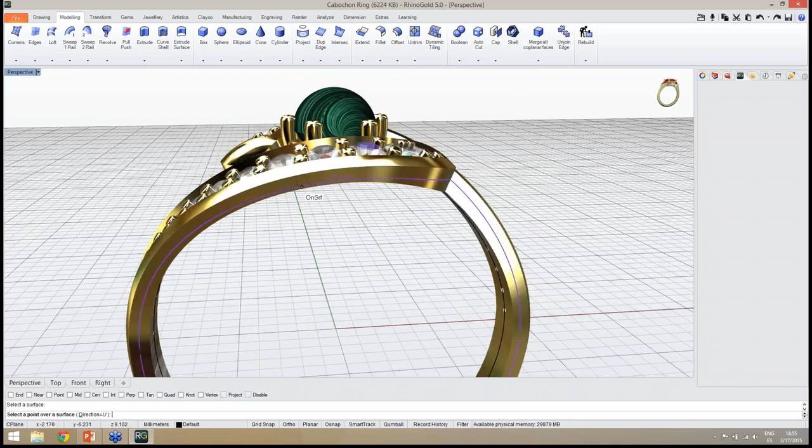So I will repeat this step to the other side. Once again, parametrical isocurve, I select the surface, and easily I will define the curve in here. So start point in here, and end point I will use here, where the gem is. So as you can see, very easy. Press enter in the end, and I have the curves ready to apply the mill grain.

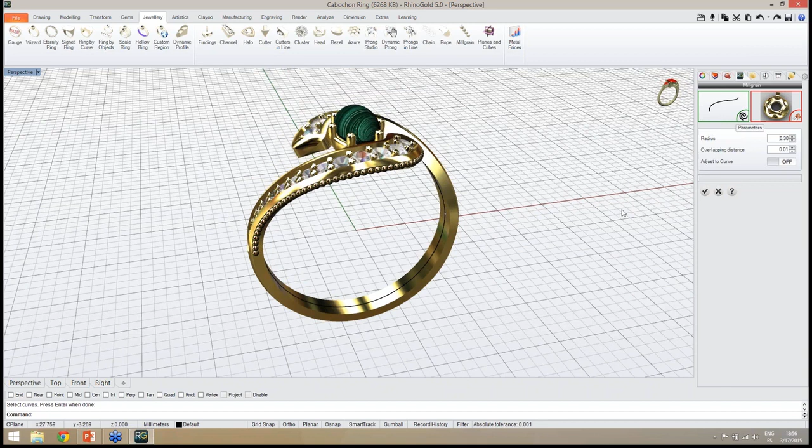So let's go to the jewelry tab, mill grain tool. I just need to select the curve where I want to apply the mill grain. So I select the curve, press enter, and now I just need to define, in this case, the radius for the sphere. So I will use, let's try 0.4, and probably it's a little bit bigger. Let's try 0.3, and overlapping distance I will use 0.01. So this is the result I'm looking for, and exactly the same to the other side.

I select the curve, mill grain tool, and in this case I will define radius 0.3 millimeters and overlapping distance with 0.01. So checking here to add the mill grain to the document. As you can see, easily we have defined our ring. Let me just hide these curves.

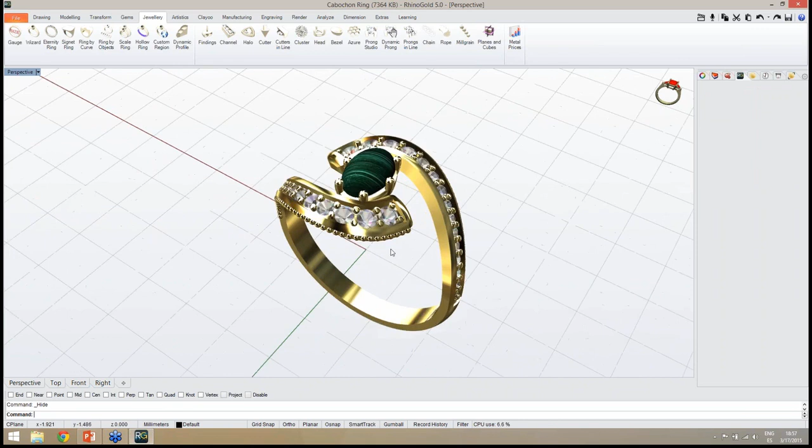So this is the idea with the Cabochon ring. This is a good model. We have a few new tools from RhinoGold 5 in this exercise. Also others we improved. So I believe it's a very good exercise to follow in the video. And to finish, I'm just going to create a render for this ring. So easily, let me adjust the render.

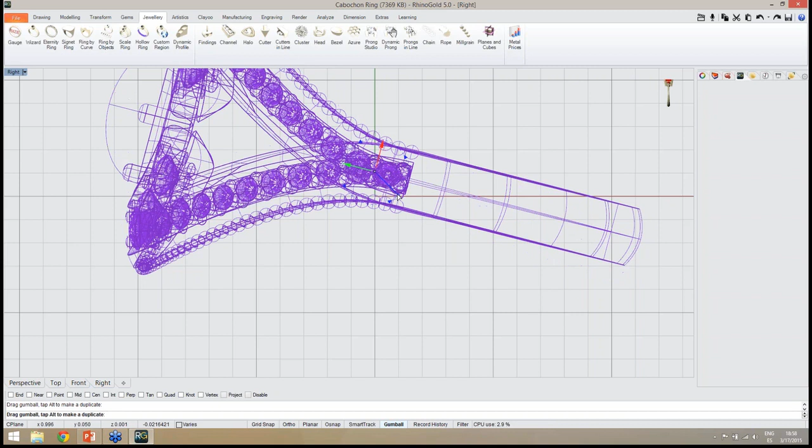I will first adjust the position. So let me go to the right view. I select the ring and I activate the gumball. I want the position like this. So just define the position as I want it to be. A little bit less rotation angle. Okay, looks good. And now back to the perspective. Let me rotate.

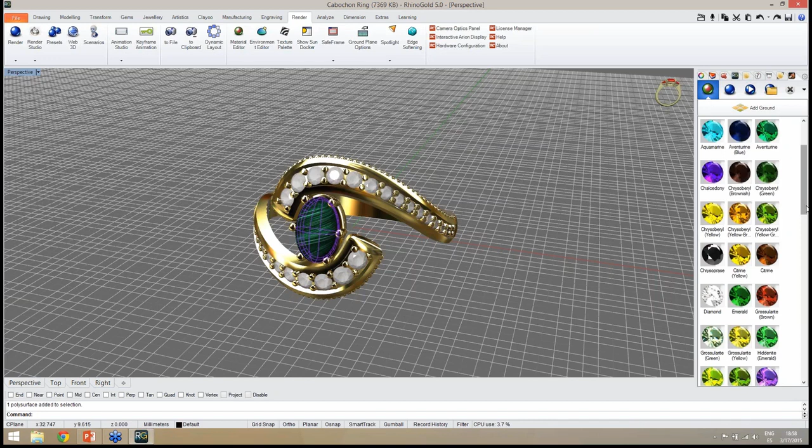And now in here I will define my render. So in this case I just need to go to the render tab, Render Studio icon, and now I can define easily the render parameters. So first step, I will select all the gems, and I will apply, in this case, let's use diamond, and the cabochon, I'm going to use amethyst. Okay, then all the other parts I can select easily in the selection filter for RhinoGold. So as you can see, I just double click in here and I select all the other parts.

So I'm going back to Render Studio tab, and now I will use metal polish. Let me use this yellow gold. And now I can easily create the render. We have also the option to add ground, but there is one good point I would like to talk about: if we don't add any ground in the Render Studio for Arion and we render directly, it will create automatically a white ground.

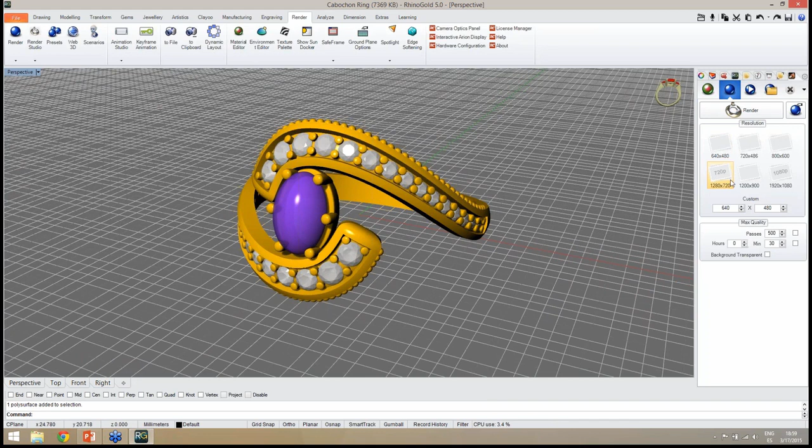So if we want a real white ground, we just don't apply any ground, and actually it's very easy to define this white ground. So now let me define the position for the render. Can be something like this, and start render. I just click on render, and now Arion is calculating the render. Let's see how it looks. Of course, we can rotate a little bit to adjust the position, but now it's calculating the render.

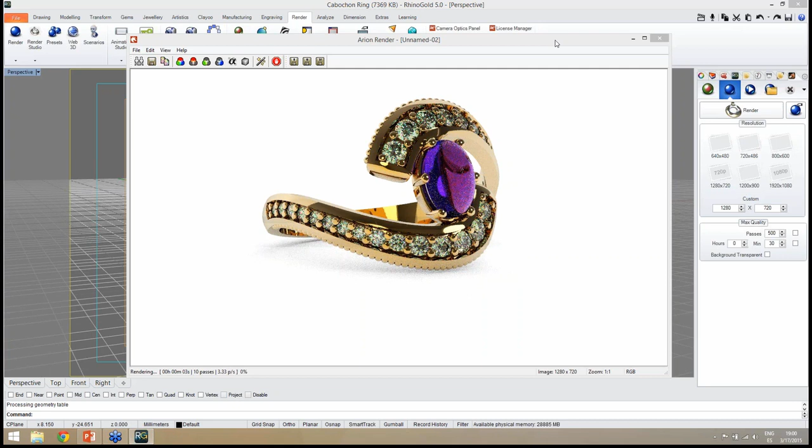Let me stop this render and let me rotate to the other side. I believe probably we have a better perspective from here. Let's check what happens. Render again. But as I was saying before, I didn't apply any ground, and Arion automatically applied this white ground. As you can see, it can be really good. Also, of course, if we don't want the ground, we can just activate this option, transparent background, and it will be transparent without any ground.

So now Arion is calculating. I define high quality resolution. Now it's calculating and improving the render.

Very good, Pedro, very good. Thank you, Xavi. Thank you, everybody. And basically, I'm happy because you made it on time. That's true. That's true. Not all the webinars I try to do it. Sometimes we need a little bit more time to explain all the details. In this case, I believe it was easy to finish on time. I'm happy. Good. I think everybody is happy. Great.

Anyway, let's see, 30 seconds, one more minute, how the render looks like. Okay, of course we could adjust a few more parameters, just a quick render, just to show a little bit the workflow. But I believe it's a good sample of what we can do using RhinoGold and Render Studio.